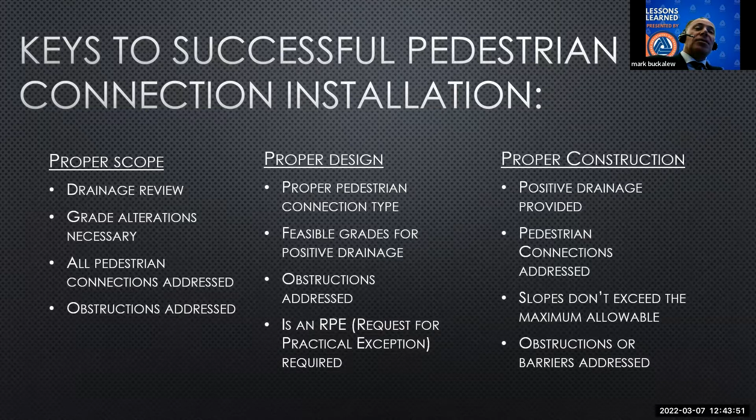And then it goes into construction. Yes, it is our responsibility to make sure we provide proper drainage, and it helps if the previous steps are done - making sure we have positive drainage and we're all on the same page. Again, in construction, we have to make sure pedestrian connections are addressed, that our slopes don't exceed the maximum allowable per the PROWAG manual, and that we address any of the obstructions or barriers along the pedestrian pathway.

Some common misconceptions about construction - I've heard these comments over the years, and I kind of want to address some of these to put those misconceptions to rest.

Construction just doesn't pay attention to the finer details of curb ramp construction. That's not quite true. There's a lot of difficulty in building some of these ramps, and I'll get into that. A lot of it has to do with the material we use and the equipment we have to use to place it. And if construction did a better job managing these projects, it would save time, effort, and money.

Again, I don't find this to be true at all. There are some really meticulous elevations we're trying to hit, and it's really difficult with some of the equipment and materials we have. The last one is construction just doesn't care about ADA. I believe that to be patently false, because I know the people I work with, and we do care about ADA facilities. It's just some of the difficulties we have constructing them that make it frustrating at times.

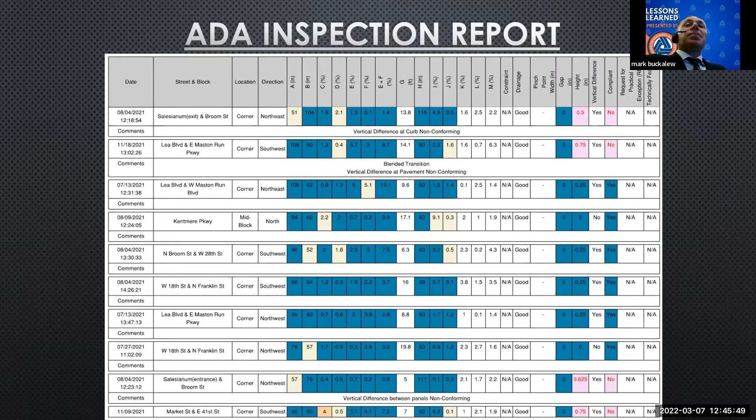Now, this was basically a pavement rehab project, so there are no grades on a pavement rehab project - it's really mill to put back to, except sometimes we'll have grades along the curb ramp themselves to help provide positive drainage across the pedestrian pathway.

When we looked back at the Google Earth history, we noticed there was already an existing ponding issue at this intersection. So when we milled to and put back to, all we did was put the problem back in the same spot. But it got flipped to construction to take care of, which we did - we had to mill and pave this again to push the water out along the curb line to get some positive drainage.

ADA acceptance issues, construction feasibility - I believe everybody watching this right now knows what this piece of equipment is. It's a roller, a hot mix roller. It's really necessary in order to compact the hot mix properly. This is a big part of our struggle to hit some of the minute grades required for ADA curb ramp construction, and I'll be referring to this piece of equipment quite often here.

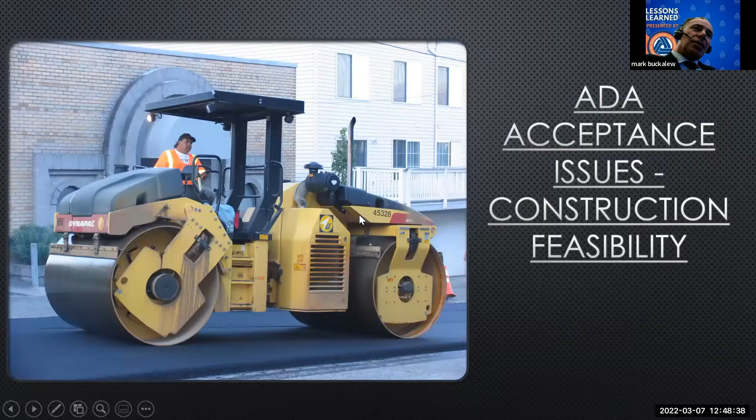Even if we placed the hot mix and hit all of these slopes - and I'll go back one - by the time this huge roller hits it, all of these grades pretty much get mashed together into some other percentage that we don't really know. We cannot hit these grades using a roller, which is a difficulty here.

When we see something like this, I've talked to some other prominent figures around, trying to get their opinion on some of our struggles. I asked Mr. Johnson, and his response was, come on man, we can't build something hitting those slopes and then hit it with a hot mix roller. So Mr. Johnson even agreed that it's not feasible.

The next piece I have here is an integral curb and gutter. The top left photo has a lot going on, so I'll break it down. It's an integral curb and gutter per the PAS standards. The back of curb, noted as K on our ADA inspection report, has a maximum slope of 8.3%. The L, or the pan part of the curb, has a maximum slope of 5%.

Now we had a situation come up. I'll protect this person's name at the time, so nobody goes back after them. But they had a curb ramp here with an integral curb and gutter, and it shows 5.6% on the back curb, and on the pan it was 7.1%.

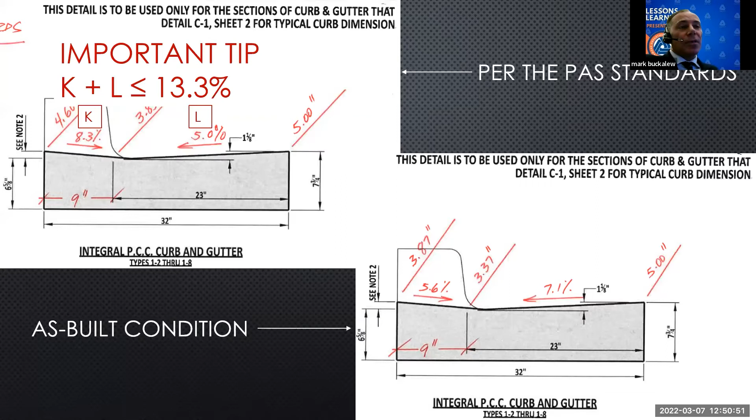Now you can say, Mr. Buckalew, 7% is pretty excessive when the maximum is 5. I agree with you, 7% seems excessive. But when you actually run the numbers, this 7.1% over 23 inches is about a half inch - actually less than a half inch. So when you're trying to finish this concrete and pave it to match your pavement, it's really hard to hit those minimal percents with the materials we're using and the field conditions we're dealing with.

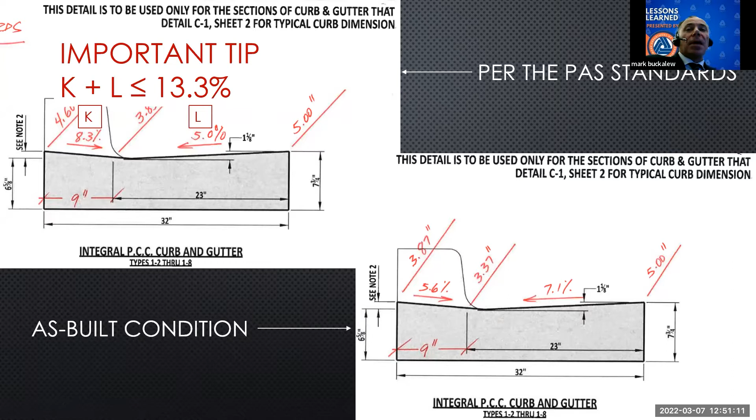So what happens is when we have a gas valve along a pedestrian pathway, we end up failing those. There's not much we can really do because we don't own the gas valve, we don't spec out that gas valve - that's the gas company. So these end up failing.

So again, going back to that quote that construction doesn't pay attention to the finer details - it's not really the case. It's hard to do with some of the materials we have and some of the equipment we have to use. That roller isn't a finite piece of equipment to hit those grades. So again, I asked some other prominent figures what they thought of these issues and what we can do.

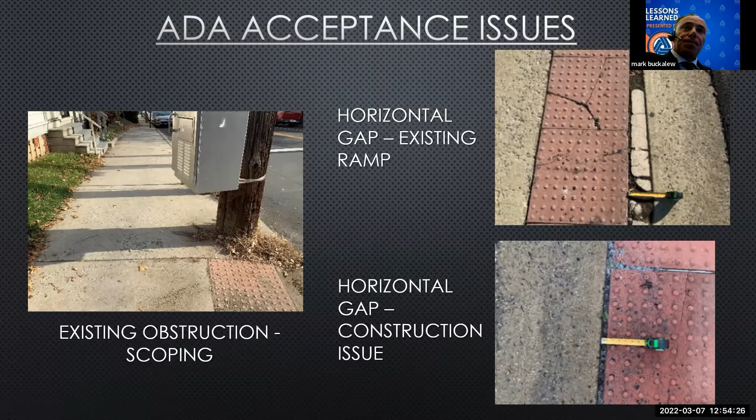But this isn't really a contract issue - the contractor didn't build it improperly, they did build it properly. It's just we're going to end up holding water because of the sediment in these flat curb ramps. But again, this is what we have to deal with here.

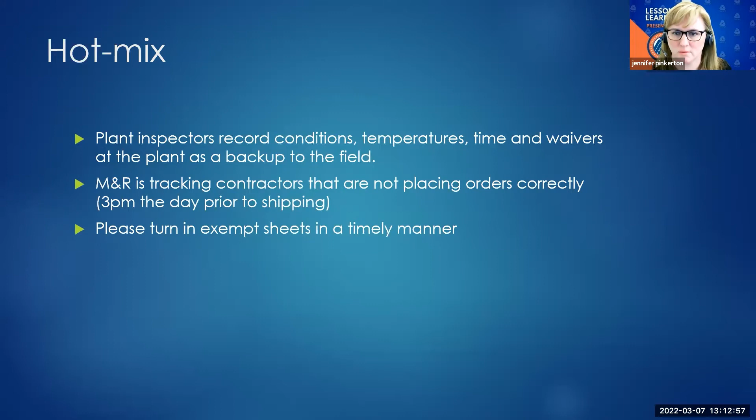Please also make sure you're turning in your exempt sheets in a timely manner. If you don't, and we send out something automatically with zero pay, only to have to redo it, it doesn't make that process very efficient, and it wastes time on our side and on the field side.

All right, moving on to concrete. Just a heads up, many of you have seen this, but it's not been on all projects at this point by any means yet. We have two companies who are now approved sources that have mobile mixers: one is GFP and the other is Curbs, etc. They're pretty much able to supply most mixes except Class D right now. If you have them showing up as a source on your project, they've been approved as sources for a good majority of the mixes. If you have any specialized mixes that are not made at the plant, I have a couple examples there.

Like the ultra high performance concrete, grouts, et cetera. For any maintenance or construction staff, please make sure your inspector is reaching out to the lab directly to get inspection set up. We otherwise will not know when that's getting ready to be placed. Our folks call the lab or the plants daily, but if these mixes, which are not being made at the plants, are not part of those orders that come in, we really need field staff to make sure they're giving us a heads up and a call when these kind of projects are happening. Typically they're picked up at a pre-pour or similar meetings, but every once in a while there's a mix like this that might not be on our radar. So please make sure you're reaching out.

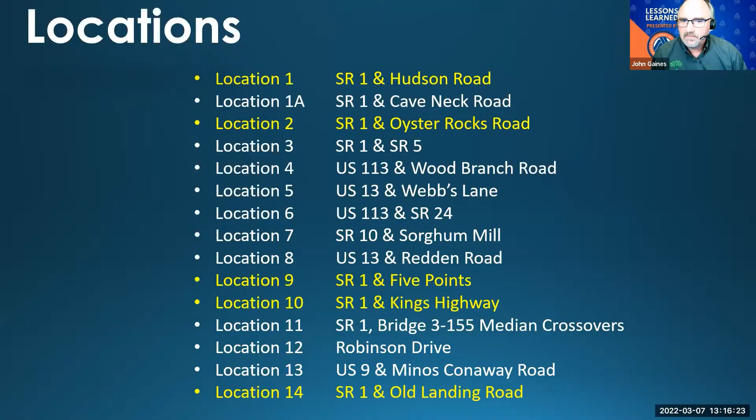I can't get the screen to advance, John. Yeah, all right, just a delay. Okay, well, I'm glad it didn't jump forward like 3 since I hit it several times.

So we started out with this initial 6 locations. This grew to 14 locations throughout the life of the contract. The ones in yellow here are still in the design process, and due to issues that we'll discuss later, they are being advertised — location 1 and 2 as a standalone contract, and 9, 10, and 14 as well.

Guess there's still a delay.

Do you have control of it, Brian? No, I don't. Oh, here we go.

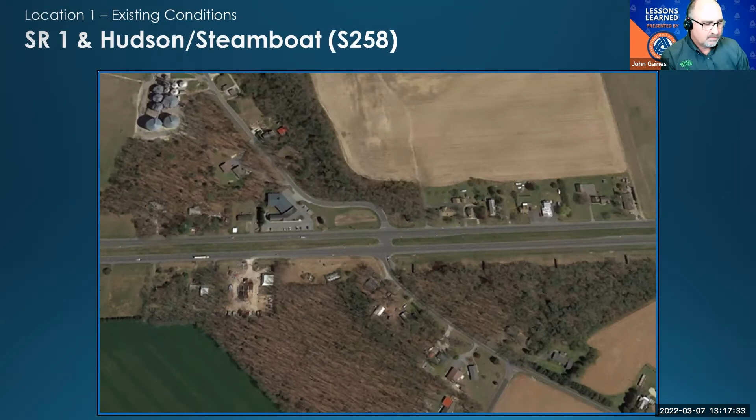The first location is on Route 1 where Hudson Steamboat intersects Route 1. Currently all movements are available from SR1 and the side streets, causing bad accidents. Our proposal is to channelize the median, providing left turns from SR1, with side roads becoming left in, right out. This one's still in design, and we're going to bundle it with location 2, hopefully delivering those once we see how things go at Route 1 and 16.

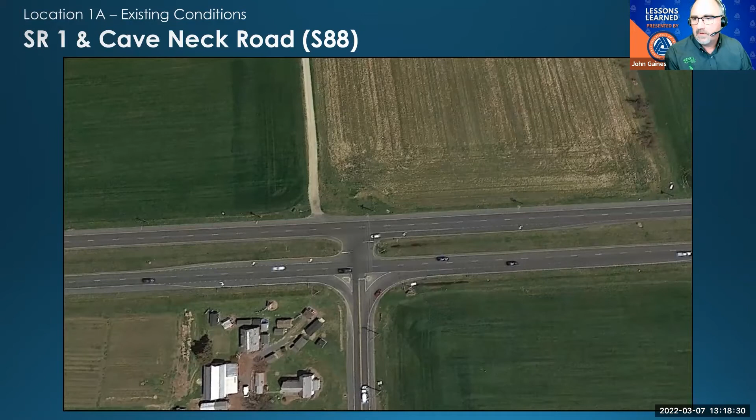This we're calling location 1A, at Route 1 and Cave Neck Road. As you can see, all movements are there as well. Maintenance had blocked off the southbound left turn lane with flexible delineators, but we know how those work, so the goal was to get that removed and extend the northbound left turn lane. I'd like to thank Josh McCloskey and his drone crew for these as-built pictures. The median's been channelized, the southbound left was removed, the side road was channelized, and the left turn lane is now about 600 feet longer than it was.

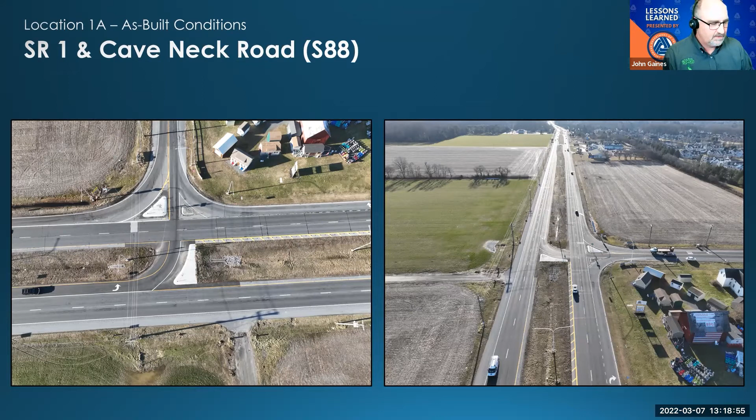Location 2 is at Route 1 and Eagle Crest/Oyster Rocks, again an intersection with full access. The proposal here is to remove the Route 1 left turn access and provide left turn acceleration lanes for the side roads. Between these locations we're also removing quite a few median crossovers and expanding one for U-turns.

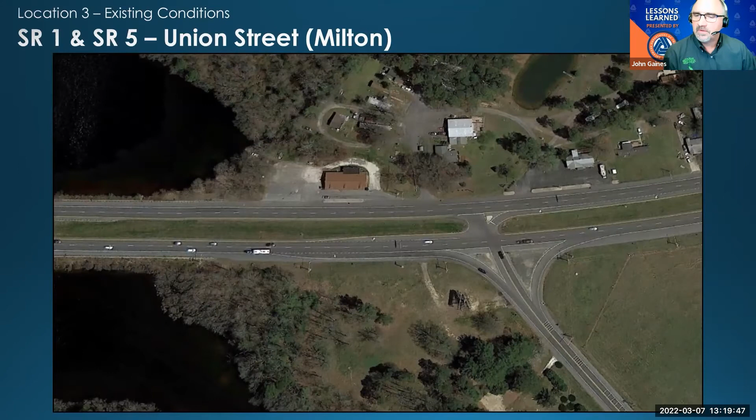Location 3 is at SR1 and SR5 coming out of Milton. Again, all movements are available, causing confusion and accidents. This one is built. We took out the access from SR1 to the side road, channelized Route 5, channelized the median, and provided an acceleration lane.

The next location is at US 113 and Wood Branch Road. This one has a bit of history - it was a former capital project location, US 113 and Almshouse Kruger, and had quite a bit of public opposition, mainly from local farmers worried they couldn't get from one side of 113 to the other. It went through several changes over the years.

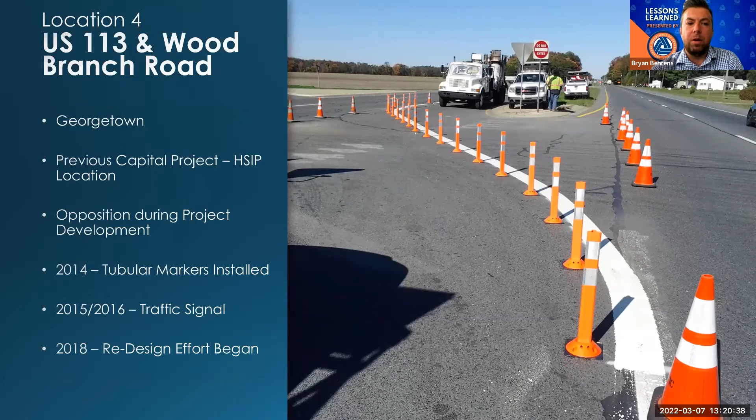This was the original existing condition back when we had the capital project - two intersections very close together with full access. We saw a lot of bad accidents from people basically trying to get from one side of 113 to the other.

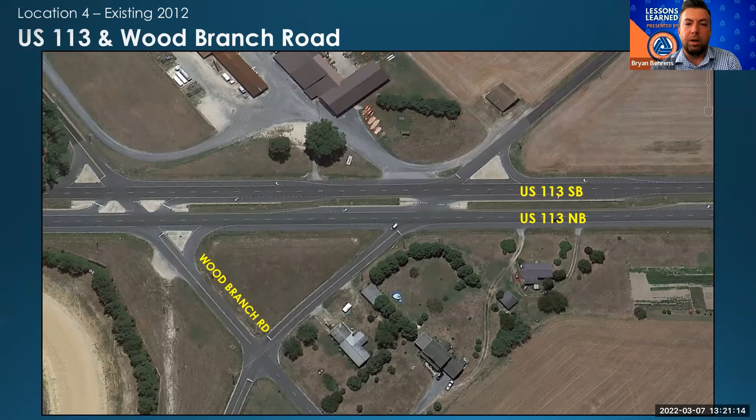From the time that started up to about 2014, a lot of that public opposition occurred. We had some bad accidents, some fatals in 2014, that necessitated the department moving forward with shutting down the median. We put in flexible delineators, really restricting that movement from one side of 113 to the other as a result of those accidents.

Part of that negotiation or compromise was to install a signal, which we ended up doing between 2016 and 2017. This shows the existing condition we were left to work with - a signal was built at the Wood Branch Road intersection, and the other intersection was basically closed off with those flexi posts.

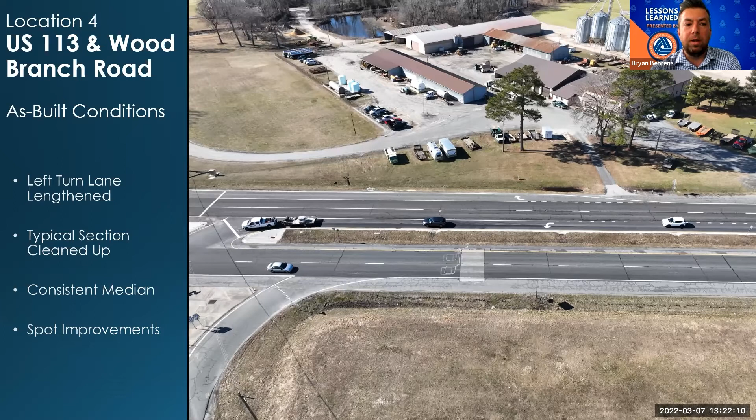What this project aimed to do was formalize that. The intersection at Wood Branch still remains with the signal, and we extended the left turn lane - it more than doubled the size of that turn pocket, and cleaned up the median between those two intersections. The length of that turn lane extended past Speedway Road too.

Good project - this was one of the first ones that went out and got constructed under the original open-end contract that we'll talk about later.

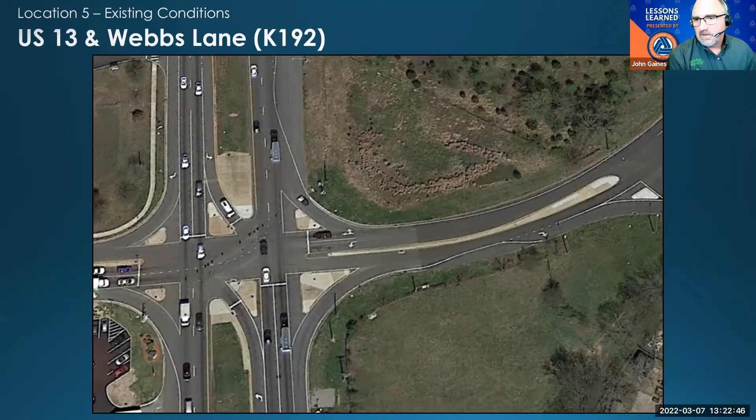Location 5 was here in Dover, on Route 13 where Webb's Lane comes out. There was no right turn lane to go from Webb's Lane heading north, which used to back up the through lane constantly. We came in and added an actual right turn lane, which came out very nice. Locations 3, 4, and 5 were the ones actually advertised with the contract - we'll talk more about that later.

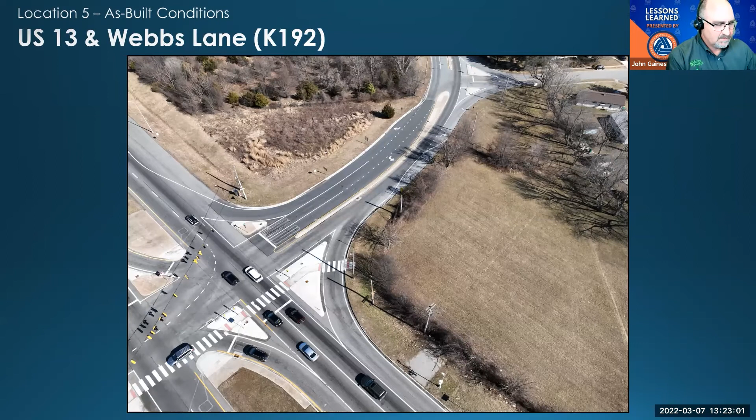Location 6 is at the intersection of US 113 and SR 24 in Millsboro, right by the Wawa. We affectionately called it the SR 24 Wawa project. This came out of the US 113 North-South study as an interim or spot improvement to install a right turn lane, but the actual project was to provide enough width for 2 trucks to get by each other.

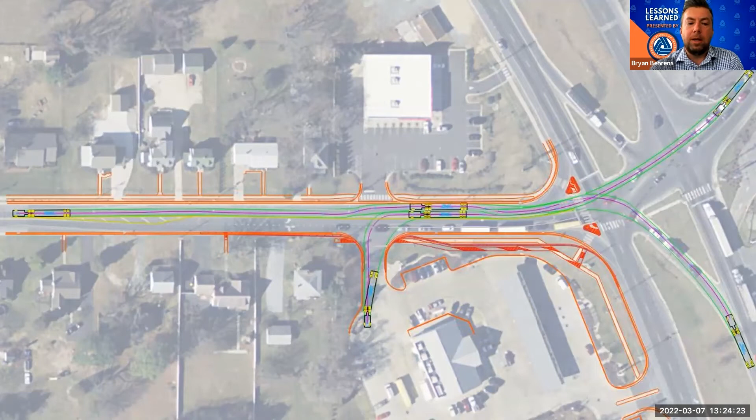Another interesting part of this project was that it included a right-of-way acquisition phase, which is really different from most of these other open-end locations. Most don't involve significant utility relocations or right-of-way acquisition, but this one did, and we had to get right-of-way, which ended up being donated from the Wawa. So, good project all around.

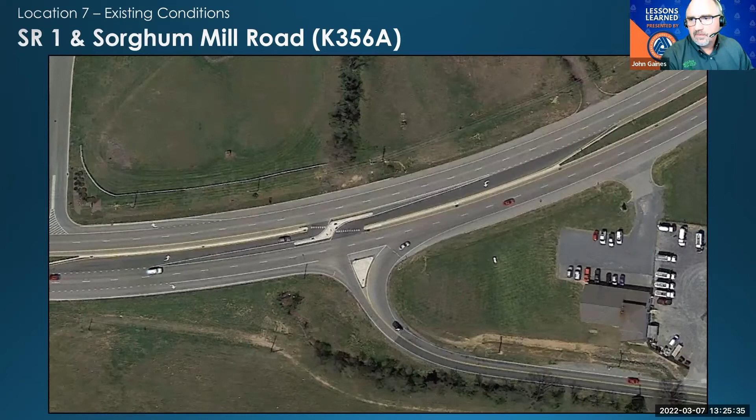Location 7 is here in Dover as well, on Route 1 where Sorghum Mill ties in. This was the existing condition: it was already channelized, but the left turn lane would back up into the left through lane at peak hours. So we came in and extended the left turn lane as far as we could, probably another 300 or 400 feet of storage.

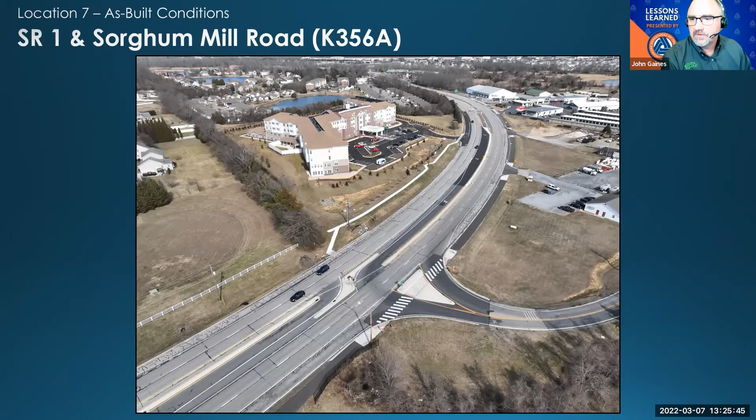The next project is at US 113 and Redden Road, location 8. Redden Road really isn't the secret cut-through anymore - it's a very busy road, especially in the summertime, as an alternative to Route 404 for traffic coming from the Bay Bridge to the beaches. On the other side of Redden Road, we built a left turn lane extension and acceleration lanes from Redden Road onto 113 in the Georgetown area back in 2018.

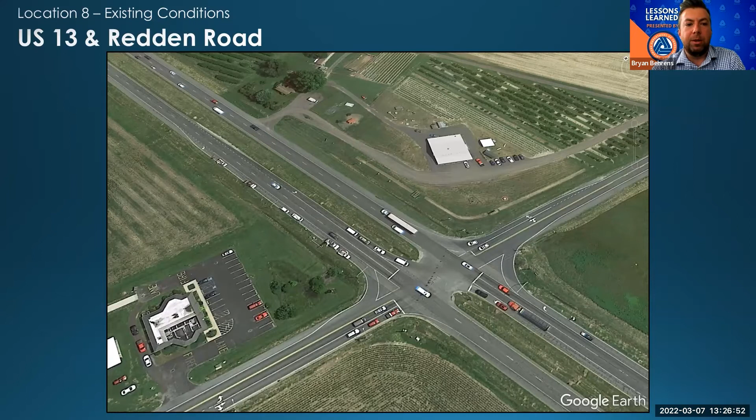The next one I'm going to show you is a bundle - this is the one John referred to. We have a coastal highway intersection improvements project. This is 3 locations that will get advertised together, and the reason is they're a little bit different in nature, though all pretty close to one another. This picture is of 5 Points about 75 years ago, from 1950, just to show how far things have come. But we tracked these originally under the open-end program.

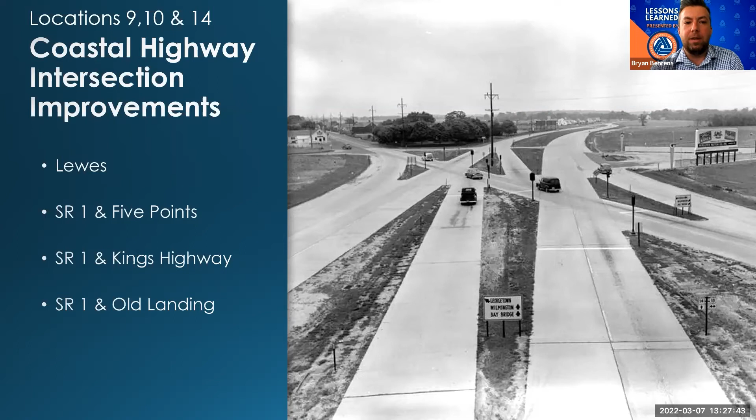So this project really is a breakout of the overall SR1 and Minos Conaway grade separation project that is in the right-of-way acquisition phase, close to moving towards construction. That project's scope is really to remove all of the crossovers on SR1, which are a contributing factor to the safety and crash pattern out there, and that project hopes to fix. So this is an early action part of that.

This will allow U-turns at 5 Points for the left turn southbound onto northbound movement. Today, anyone wanting to make that movement actually has to go through 5 Points, make a left onto Savannah Road, and use the at-grade loop to come back around and access northbound SR1. So we're going to allow that U-turn movement.

In order to do that, we have to rebuild some of the pork chop island on Savannah Road. And while we're there, we're going to build the auxiliary/merge lane that will be part of the decel lane for the off ramps associated with the grade separation project. So this one does have a bit of a time factor to it. We want this done before we start construction on the overall Minos Conaway project.

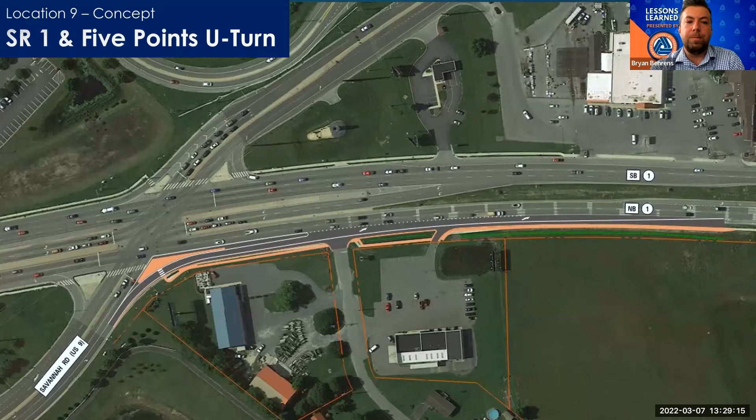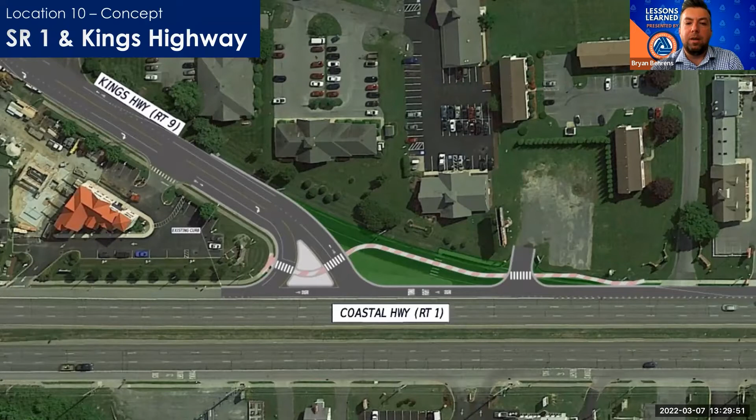The next location is further down Coastal Highway, at SR1 and Kings. This is born out of some bad fatal bicycle accidents at this location, and we're looking to tighten up the radii for the right turn onto Kings Highway - that's traffic moving northbound on SR1 entering onto Kings Highway, which is the movement we're trying to slow down. We'll also clean up some of the pedestrian and bicycle connections in this area.

This next one is a bit of a new one - the previous two have already been through a design effort with our support sections, but this one is just in that phase right now. A little further south from Kings, this is where the Walmart shopping center is on Coastal Highway in Lewes. There's a double left turn lane on the northbound SR1 side turning into Rehoboth Mall Boulevard, and those don't get used nearly enough - there isn't demand for a double left turn lane there.

So we're going to try to repurpose the median and extend the left turn U-turn movement for southbound SR1, because there is demand there. That's what this project will hope to achieve - it'll more than double the length of that U-turn movement, which can see significant stacking at peak hours. That project will all be bundled together and advertised, and they're working through that process right now.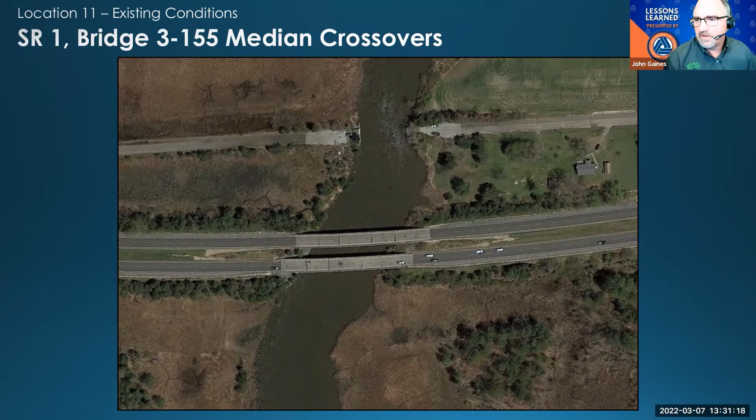The next location was actually a bridge project - bridge 3-155 over the Broadkill, which is currently under construction. They asked that we facilitate the median crossovers for the contraflow for these bridge closures. This one went out pretty early. The picture doesn't really show the median crossovers well, but it just showed that we were helping our friends over in Bridge.

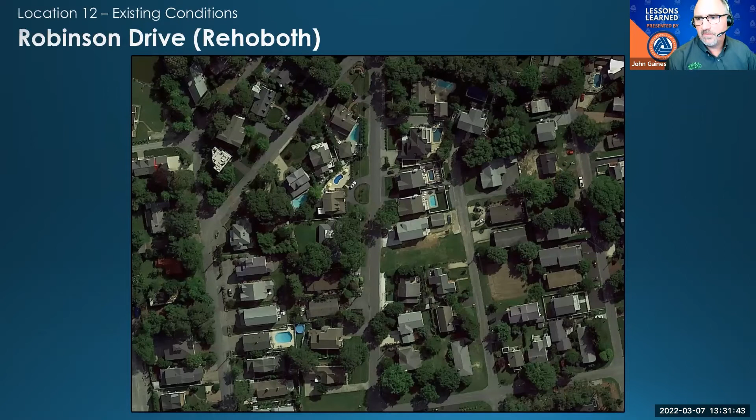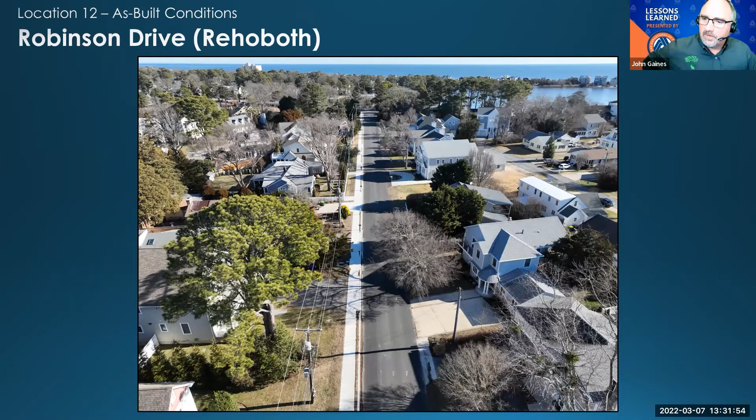Location 12 was actually a CTF project for a legislator. It's on Robinson Drive down in Rehoboth - it was a resurfacing and sidewalk installation. That one was completely out of our wheelhouse, but it was run through this contract.

Location 13 was at US 9 and Minos Conaway Road. This is a CTP project, I think beginning PE funding either next year or the year after. Where this one got started was, again, with the SR1 and Minos Conaway grade separation project - this Minos Conaway Road will be a detour route, and we know there may be significant demand on the right turn movement there to get onto 9. There was also a pavement rehab going to resurface Minos Conaway Road, so we looked at opportunities to install a right turn lane, hoping we can knock out the future capital project with this one.

The next slide shows the existing condition there - the screen's kind of flipped. What we did here was really just use the right-of-way that already existed, dedicated from the subdivision. You can see the hammerhead entrance there and the sidewalk, and we used that space to put in the right turn lane. So we did not need to acquire right-of-way for this project.

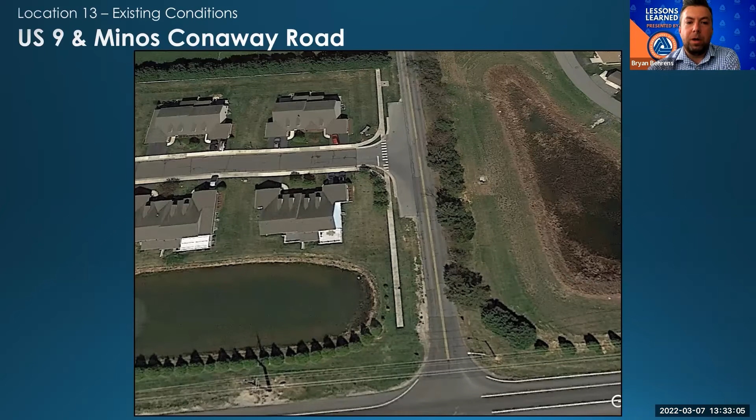I think I touched on most of the finance bits, but as the financing kept changing, not only from federal to state only, but there's different funding for NHS versus local roadways. As we worked through that with Federal Highways, they eventually shut down and were not going to participate any longer due to the mixing of so many different funding sources, which was the first step of the demise on this contract.

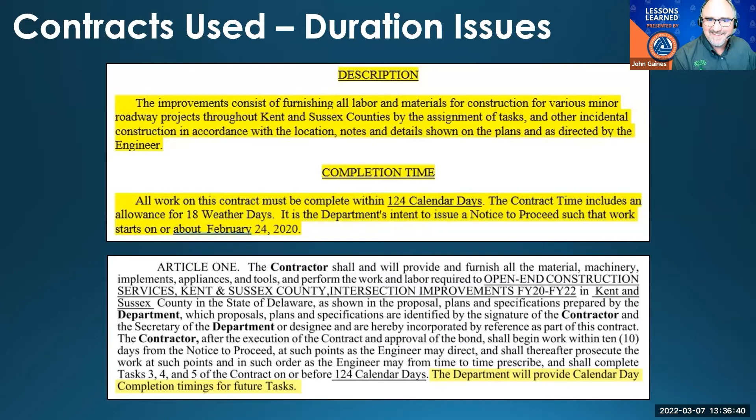No, that was good. I just want to say thank you, really, because all these sections had to come together to get these built, and most of these are built and done pretty quickly. When you think about our overall program, projects can take years - they do take years - and our projects lately seem so big, large and complex that it was kind of refreshing for our group to work on some of these that had an immediate impact and we could build and get out there quickly.

All the support sections that helped - we still had to go through all of our reviews and get statements for some of these. Then on the back end, pavement rehab, and the construction staff that was inspecting it and managing it from that end - just to say thank you, because it can be viewed as extra, but we're still delivering projects that have an immediate impact to the traveling public.

So I think it's overall a success, but definitely some growing pains and lessons learned, like John said. Yeah, one other lesson to add was all of the original locations on SR1 were supposed to be night work, but then when the world got shut down by COVID, we were able to do all of those locations during the day, which made it much easier on the contractor and the construction folks. So there's a silver lining in every situation, I guess.

And thanks again to Josh and his crews for the photos. There's also videos for each one of these locations, but that would have taken way too long for this presentation. So I think that's it from us, John.

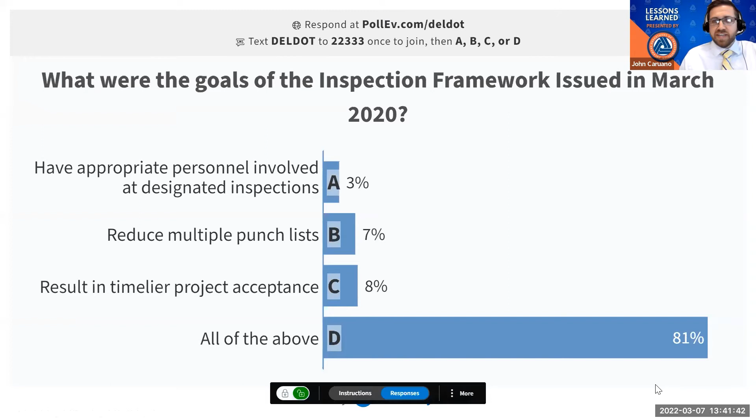All right, it seems like a majority of you answered D, all the above. I think with most multiple choice tests, having that option piques your curiosity and you think that might be the answer - and it is, all the above. Let's see if I can go forward. So that was all the above - all those had the same goals, or we had those goals.

One of the highlighted priorities was project acceptance, though. That's what we wanted to try to focus on improving.

So at last year's lessons learned workshop, I presented an overview of our progress to date, some examples of punch lists, some good annotation on the initial punch list, and some items we saw in primary inspections - some repeat items that keep showing up. Then I discussed the next steps we would take as a department to look at the framework going forward.

Since then, we looked at the data from March 2020 to February 2021. We did 123 ADA inspections. 85 of those needed corrections of some sort - they had ADA compliance issues like Mark Buckaloo was talking about earlier. And 38 of those reports were actually compliant, so we didn't have to take any other steps.

The average time it took us to have the inspection from the request was 23.5 days, and we're always trying to work on improving those numbers as well.

Looking at primary inspections from the same time frame, we had 122. Of those, 53 initial punch lists were submitted with the request, which the framework requires. Only 7 of those 53 had an annotated initial punch list - this indicates the item was resolved and usually shows documentation as to how it was resolved.

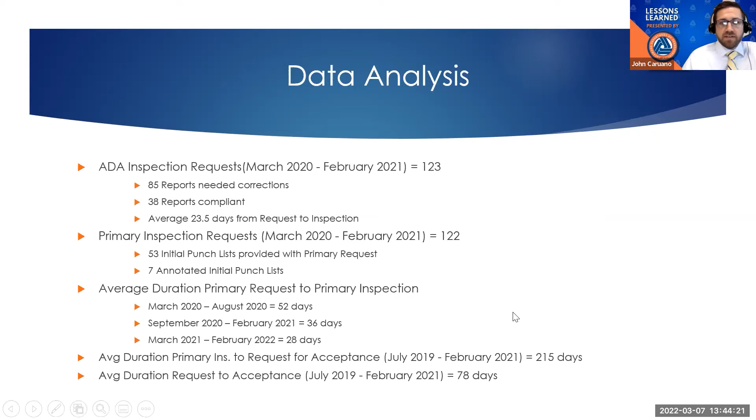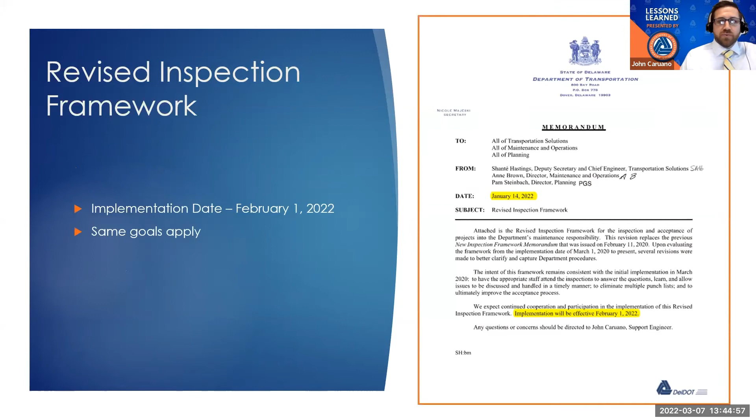So some data that we looked at, along with observational feedback from various groups we polled last year. We surveyed the administering construction groups, engineering support, DCA, and maintenance and operation, and asked how we could improve this process and what they'd like to see going forward. We took that data and revised the framework, changing the verbiage with a lot of the same players involved. The revised inspection framework was issued in January with an implementation date of February 1st, 2022, and the same goals still apply.

So next, we're going to have a riveting good time and look at the text changes. Brace yourselves, this is going to be a great exploration in wording.

So in the first section there, we talk about the ADA inspection, that it should be held approximately 30 days prior to the initial inspection and identify any deficient items. We also discussed the use of ACIA, the ADA Compliance Inspection Application, to document feasibility or accessibility measurements for reporting purposes.

So we'll use ACIA to report out to construction the items that are deficient. We also added a section talking about the initial punch list to include these ADA items, and that the administering section will utilize ACIA to make any updates to the items listed. So as we correct those deficiencies, we should be using ACIA to document changes, like if it's a percentage change, or take photos or provide other documentation as to why something wasn't addressed.

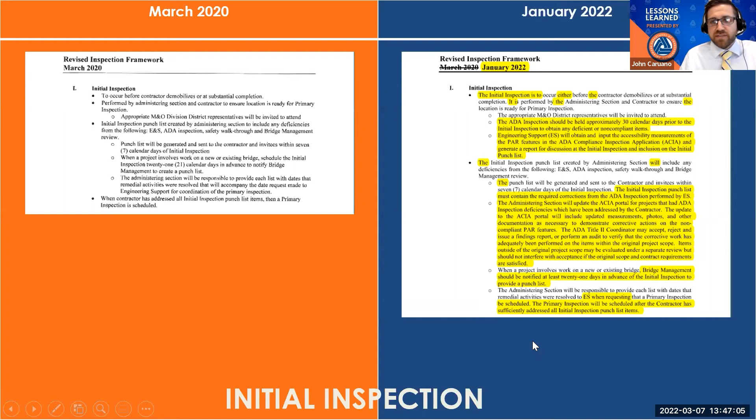So really the takeaways here: the ADA inspection should be held 30 days prior to the initial. We know that's not always practical. As an administering section, you don't want to schedule it too early, otherwise you're going to have a lot of non-compliances. For instance, if we request the ADA inspection before the top surface is provided at a pedestrian connection, you're going to have a vertical surface identified as exceeding that quarter inch. So you should try to have all the features up to a level that we can actually perform an adequate ADA inspection. We don't want to waste too many people's time with unnecessary non-compliance if we're not ready for it.

Also, the ADA inspection is going to be documented in ACIA, which I talked about. The punch list should contain these ADA items, and the administering section will now be using ACIA as part of the punch list annotation.

So moving on to the primary inspection. Really here, the scheduling was revised. As I talked about earlier, the transition time when we rolled this out in March of 2020, we had 45 days as we were changing our processes, and then we changed to 30 days after 6 months. So we're going to leave that at 30 days, but we also included the request for the primary inspection to include an annotated initial inspection punch list.

So this is the list that has the items rectified, as well as how it was resolved and the initials of an administering section representative. That's also in the middle of your screen there, where it talks about the annotated initial inspection punch list including the dates of when an item was remedied and resolved, as well as the initials of the administering section's representative responsible for oversight of the corrective actions.

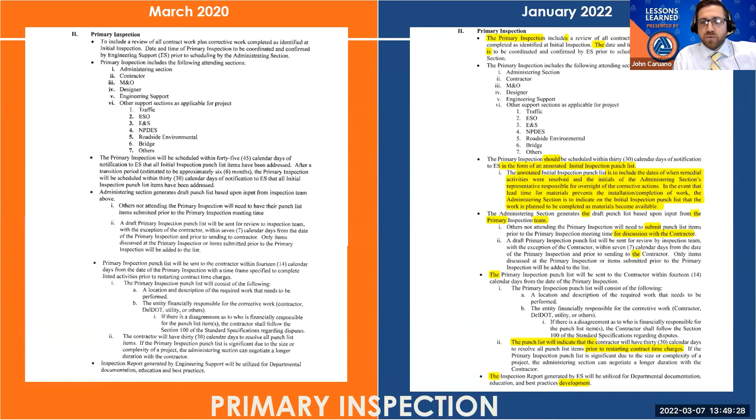So the takeaways again: we're going to schedule the primary inspection 30 days within receipt of that annotated initial inspection punch list. The annotated initial punch list includes the dates of resolution and the initials of that administering section representative, and also indicates items that may have long lead times. So if you can't get a material to complete the work, please let us know on that annotated initial inspection punch list.

Moving on to the acceptance, we removed the word inspection at the top of the screen and added some information regarding the ADA side of this. We included the language about the ADA Title II coordinator reviewing the primary inspection report, as well as the ACIA data updated by the administering section, and then issuing a recommendation for acceptance to maintenance and operation, as well as engineering support. That recommendation for acceptance should happen within 15 days of receiving the annotated primary inspection punch list.

And at the very end, we just added a line about project closeout and beginning the project acceptance process.

So again, I kind of just reiterated those same facts, and I know this is a very dry topic to talk about, but I encourage you to read the framework and get familiar with it. If you have any questions, please reach out to myself and we can try to work through it.

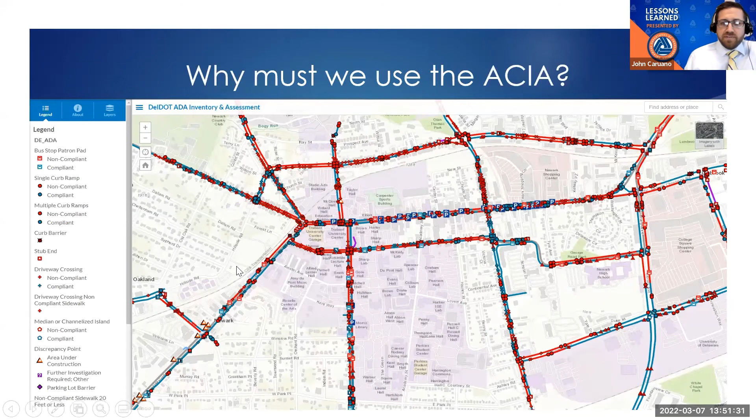So why should we use ACIA? Well, we're capturing a lot of information when we do our inspections. This is actually a screenshot of the DelDOT ADA inventory and assessment, used for updating the transition plan. So we're capturing this information to report on our compliance and accessibility of our pedestrian network. So you all, as administering sections, are critical in that role of turning these facilities to a compliance state.

So we only had the paper forms previously, and it was very cumbersome to take all the paper into consideration and evaluate our network as a whole. So having this ADA inventory like this makes it a lot easier to manage and understand where our weak links are, where our disconnections are, and so forth.

And just a note there, in 2021 we actually changed the compliance status, or set the compliance status, for 3,188 curb ramps. So those are both new curb ramps and ones that were affected by our projects that were inspected. That's a lot of curb ramps that were brought online as part of our efforts over the past year.

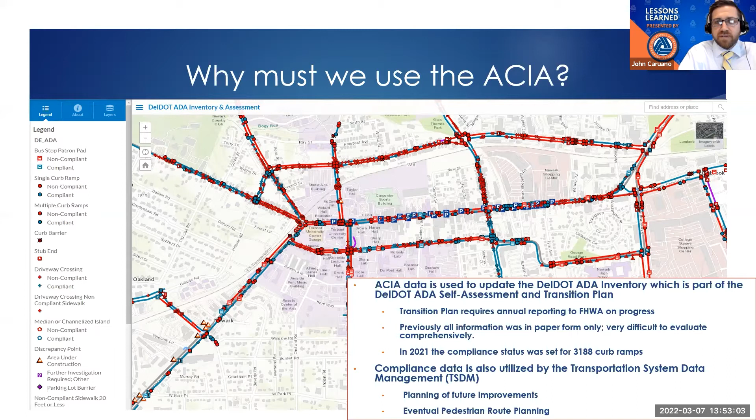And we can use this data through the TSDM. This allows for better planning of projects and scoping of our future improvements. It also allows for the eventual pedestrian route planning and investigation of compliance inquiries. If the public would inquire about the status of a certain facility, we could utilize this desktop tool and visualize the location and see if there's compliance issues with that location in question.

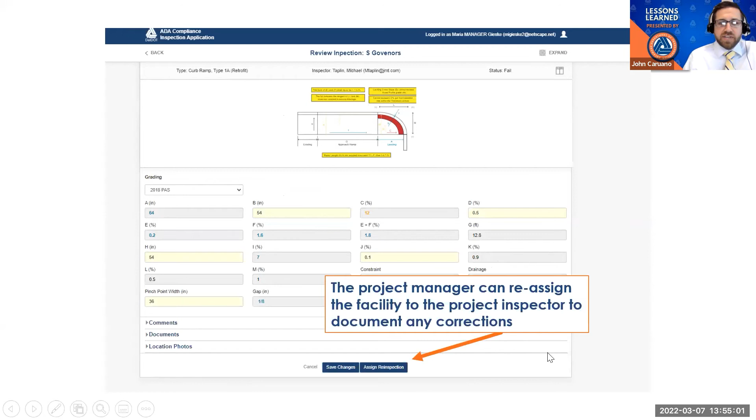So you select Review Complete to access the data. Again, this is the project manager's view. They open this up and it shows the type of facility that was inspected. There are a few fields that are in red text, and those show you the features that are not compliant and need further remedy. So the project manager can then reassign the facility to the project inspector to document any corrective actions.

You'll have the same screen that the manager had. Again, it's in red. Make the corrections to those values. If they're the correct values, they'll change back to a blue color. Then you can use these fields on the right-hand side to add a comment, upload a document or correspondence.

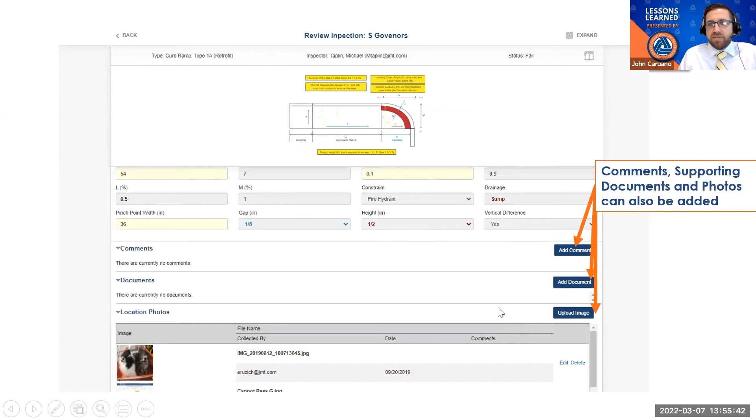Or even include a photo regarding the reinspection. Then you would save the features, and the workflow goes back to the manager.

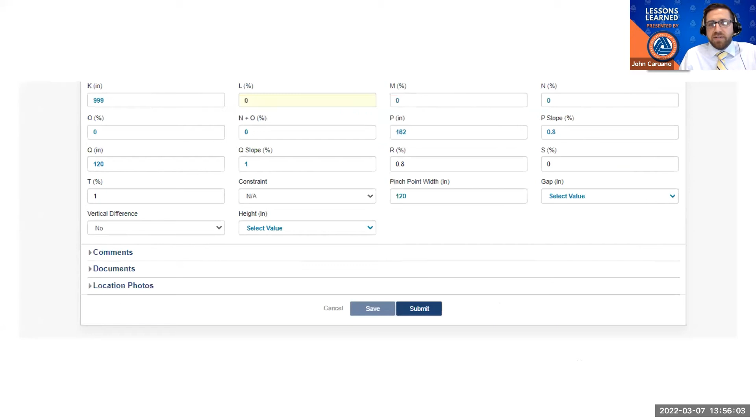If you would like any training on ACIA or access, please contact Maria and she can get you set up. We also recently included some directions on the DelDOT construction manual wiki page under Part F, e-construction, I believe at the very bottom, Part 4, which has step-by-step directions on how to enter the data from a project manager or inspector standpoint.

So just to recap the recommendation for acceptance process I talked about earlier: once all those facilities are re-inspected and submitted, you will request the ADA inspection by emailing dot.adasupport@delaware.gov.

Include the original ADA report that was issued by engineering support. It makes it a lot more helpful for the review. The ADA section may review, request re-inspection, or request any additional information if necessary to verify that things have been resolved.

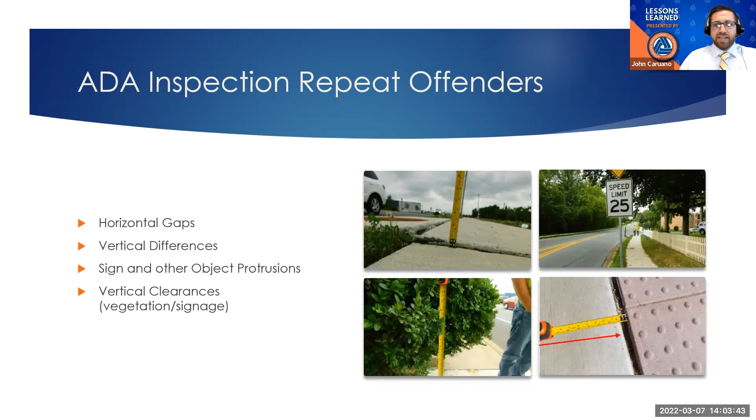There's a few items on the primary inspection that keep coming up too. I know Brad specifically is going to talk about some of these tomorrow on his pre-initial inspection checklist efforts, so I won't go into too much detail, but things like the sign sleeves, we see exceeding the 4-inch maximum on a routine basis. Also pin assembly not installed properly for double street blades, and concrete joint spacing - sometimes there's no joints in the concrete.

Inlets need to have steps when they're over 4 feet. Also flow channels and the grade orientation sometimes is not correct. Things like vegetative stabilization, guardrail hardware might be missing or loose, and bituminous joint sealing - when we have that butt joint up against the new pavement, we should have a joint seal along there.

Also the sidewalks and shared use path adjacent grading, we should be at 6:1 for 2 feet. I know it's not always practical, but that's what the detail has, and that's typically what's in the typical sections on the plans. And then utility cover access - it might not just be for the utility companies, but even the DelDOT maintenance access for manholes.

So again, like I said earlier, we're trying to get to a timelier project acceptance. How can we achieve this? How can we move the scales down a little bit? I think we saw earlier it was like 200 and some days, and 70 some days - that was back in 2019 to 2021. But we want to really reduce that time frame here. So if we catch more items on initial inspection, it'll help head off some of these long punch lists, so we can eliminate those repeat offenders we keep seeing.

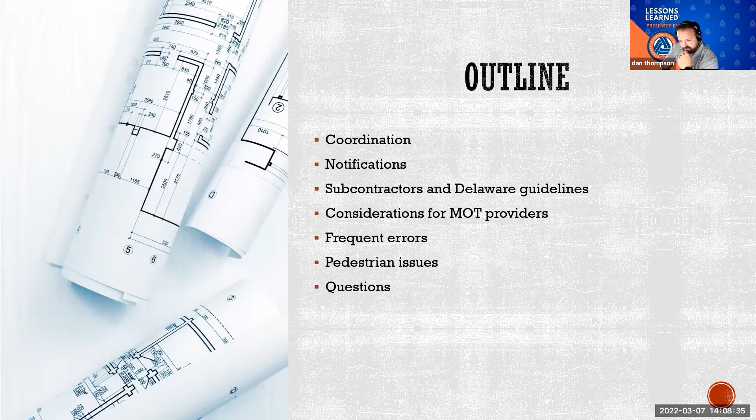All right, so coordination - what needs to happen with coordination? Prior to the utility permit submission, so if there's any questions about MOT, it doesn't have to be a utility permit, any kind of MOT coordination, please reach out to us, Traffic Safety. We're not trying to hold things up. I know it might seem like that, but we're here to work with you, work through it.

We'd rather hit it right off the bat and get everything done so there's no hiccups in the plan approval or utility approval process. So prior to capital or advanced relocations, these will have a set of approved plans, so any changes or modifications need to be coordinated with traffic safety and the construction staff. These projects will be subject to pretty much the same time restrictions as the main project, so anything that goes out for advanced utilities has to follow those same guidelines or that matrix that's in those plans.

So the utility contractor needs to make sure that they get out and that those are referenced to them before the work begins. And then everybody needs to coordinate with adjacent projects, any road work, construction, or MOT working in the same area. They all need to coordinate and make sure that things aren't overlapped or in conflict with the Delaware MUTCD. Again, we can come out and help you guys out with that too.

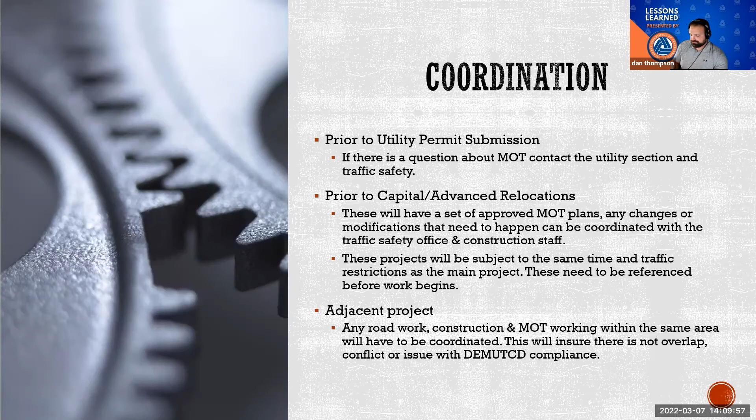All right, so subcontractor issues. Some of the issues we've seen are there's subcontractors that come from out of state that aren't familiar with Delaware standards. We need to make sure they're familiar with the Delaware MUTCD, our contract guidelines, and the time restrictions. They'll come out and say, hey, this is what we do in Maryland, this is what we do in Pennsylvania. We need to make sure they're educated on what they need to be doing in Delaware.

Field issue resolution. So when we go out in the field, we need to know who the point of contact is. They like to play the blame game a lot. If they're a subcontractor for the GC and they're from out of state, it's 'they didn't tell me' or 'I didn't get that information.' So make sure everybody in the field is coordinated, and that person is the one who can actually make the change. We run into that quite often.

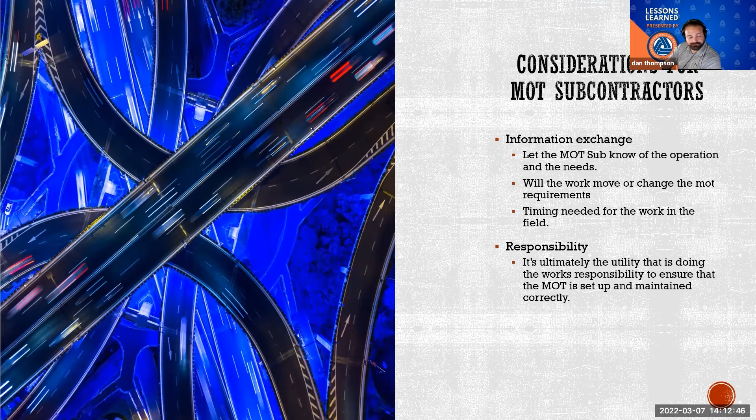Some errors that we see with flaggers. A lot of times we'll go out there and there's flaggers that aren't certified in Delaware. They may have the ATSSA certification, but they need to make sure they have the Delaware certification on their card. Some states allow just the federal standard, whereas we don't. We have some state-specific guidelines when it comes to flagging, and they need to be certified through a program such as ATSSA, but also certified in Delaware.

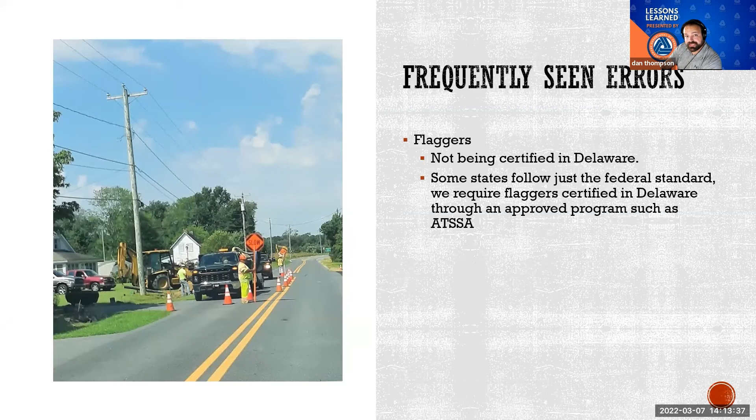So frequently seen errors that we see on signage: incorrect sign heights on temporary signs. There's a picture there of a sign that's a little too short. The standard for a temporary sign is 5 foot from the bottom of the sign to the top of the road surface, and for a permanent sign, it's 7 foot.

Some of the other issues we see is incorrect sign spacing on the roadway for the typical application. I'll have another slide that has a chart showing how far signs are supposed to be spaced apart based on the type of roadway. Another big one is we see signs being stored in the right of way all over the place when they're not in use. They need to be either removed or placed behind positive protection, because that can become a hazard to an errant vehicle running off the road.

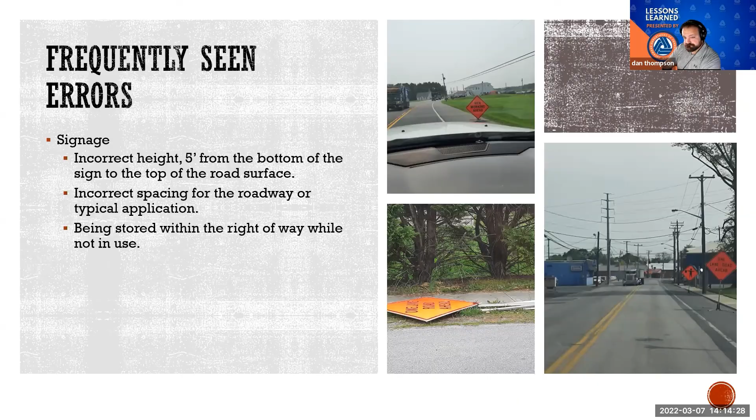Some more frequently seen errors. For devices, a lot of times they'll be damaged or dirty, and that'll make them non-compliant. If they're not reflective, if they're not bright, we're going to ask that they be replaced. We follow the ATSSA quality guidelines - they put out a pamphlet and a brochure that gives examples of what's good, what's bad, and what's marginal. That's what we use to go off of for this.

And that's also the incorrect length for the tapers, and that's what we see a lot of too. So incorrect taper length and spacing, based on the setup, the shift, the closure, the roadway, and the width of the shifted area. It might sound complicated, but the Delaware MUTCD has all the charts and breakdowns in it.

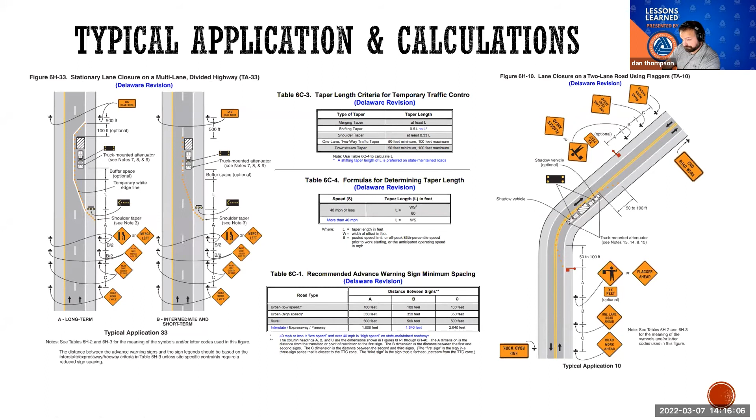Some specific MOT we see a lot of would be like a rolling roadblock. There are only special cases where we would use this, mostly for aerial crossings on major roadways, since we don't allow lines to be moved over live traffic. So that's mostly where we'll see this. Prior to an event like this, it needs to be coordinated with traffic safety and construction so we can figure out timing and make sure everything needed is going to be out there on site.

To hit on pedestrian issues, we treat pedestrians the same way as we do a vehicle. If there are facilities on site, they need to be maintained if they're going to be blocked. It's important to know the area you're working in, because it can be a little tricky if you're working down in the beach area where there are pedestrian facilities on one side, not on the other. There are different ways we can come up with working around that.

We can use a pedestrian detour. If they're taken away from the sidewalk, you have to use approved material and special devices to delineate them. You can build a path around your work zone, but you just have to make sure it's material approved for that use. And in some cases, we can use pedestrian flagging. If you're only going to be working for the day and everything's going to be closed back up at night, pedestrian flagging is a much better and easier option to use.

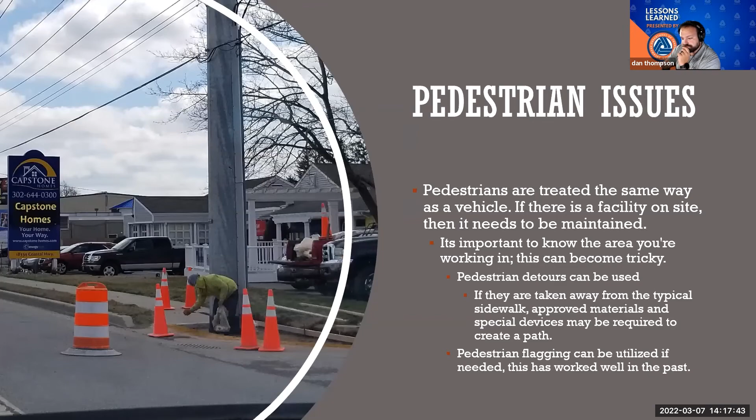We do have specific MOT for pedestrians and bikes. Down in the Dewey area, we have a shoulder that's actually a bike lane and a pedestrian lane. In those situations, we had to come up with some creative MOT. This involves closing a lane of traffic and placing the bikes and peds into that closed lane, channelizing them with specialty signage.

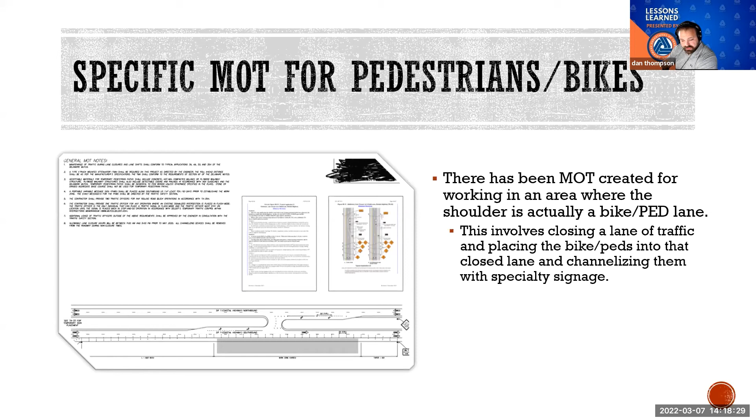This way, even if they're only working in a shoulder, those peds and bikes still have to be accommodated for, so we're going to have to close the lane. That needs to come into consideration when you're thinking about lane closure hours or things of that nature, because of the type of lane that it is - it's not just a shoulder. Pedestrians and bikes must be maintained, so once the MOT is in place, it must remain unobstructed and open to traffic, just like a normal lane would be. If you're parking a TMA, or you have a bucket truck or a piece of equipment parked in that lane, that's not what it's for. It's there to accommodate the lane that you're already closing.

To briefly hit on detour and design approval: detours must be submitted to traffic safety for review and approval. They have to be on our border with our legend, and they must be signed and sealed by an engineer. They need to be added to the UPA, or added into the plan set. The project manager will need to submit a road closure form along with the signed detour to the TMC for notification. Once all of that has been done and everything submitted, we can go to traffic safety and approve that road closure, and all that information is blasted out.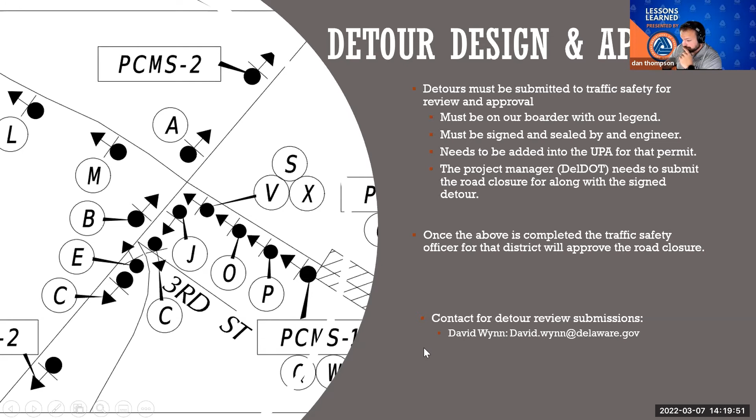And with that, I don't know if there's any questions, but that would be my portion of the MOT here. Kerry Yost is going to take over and handle the next section.

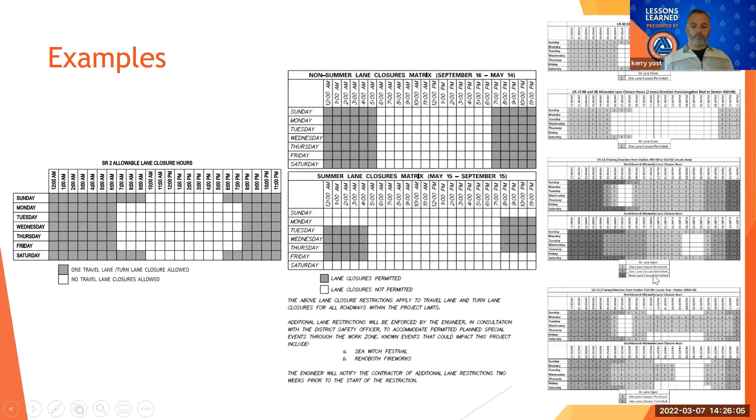Why do we use allowable lane closure or allowable work hours? We need to reduce the roadway capacity so we can facilitate doing work within the travel lanes or immediately adjacent to them. Anytime our traffic volume is going to exceed the capacity, we're going to have congestion, backups, and delays. People are going to notice their commute is delayed versus their normal travel time.

So when we close lanes, it also tends to push some traffic to the surrounding roadways. Drivers are going to seek alternate routes, and this may result in complaints and disturbances. People are going to seek cut-through routes, potentially through neighborhoods or other low classification roadways.

We also note that when we close lanes, traffic typically backs up and gets congested, and certain types of crash frequency will tend to increase, specifically rear-end type crashes.

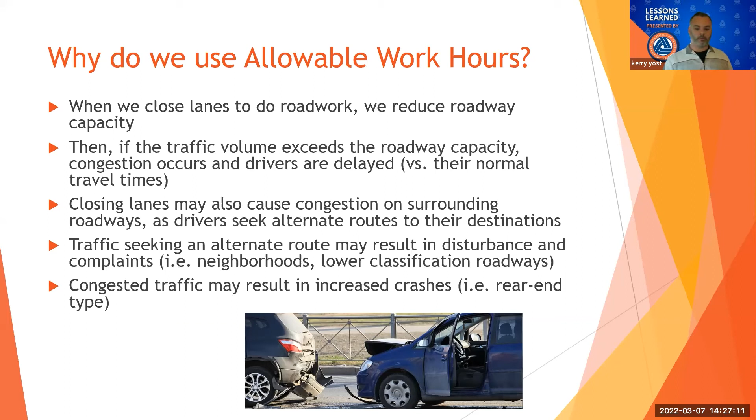So how do we work with engineers to determine what the allowable work hours are going to be? We have traffic data available from a variety of sources. We have a strong network of traffic monitoring and counting equipment, whether automatic count stations or loop detectors on our existing traffic signals. We're able to pull that data and quantify on an hour-by-hour basis what the hourly traffic is for that roadway facility. Then, based on the lane capacity for that facility, we can determine if closing this lane during this hour puts us over or under capacity. It's really just that simple.

On our lower volume roadways where we don't have active monitoring equipment, we could set a temporary solution such as a tube counter or an automated video counting solution.

We also have the traffic summary book that planning maintains. Using that resource, it's not an exact science, but we can take the ADT from the traffic summary book, and then we have data called the diurnal distribution—we expect 5.3% of the ADT to be during this hour, for example. So we can break it down on a 24-hour basis and determine our allowable work hours based on those numbers.

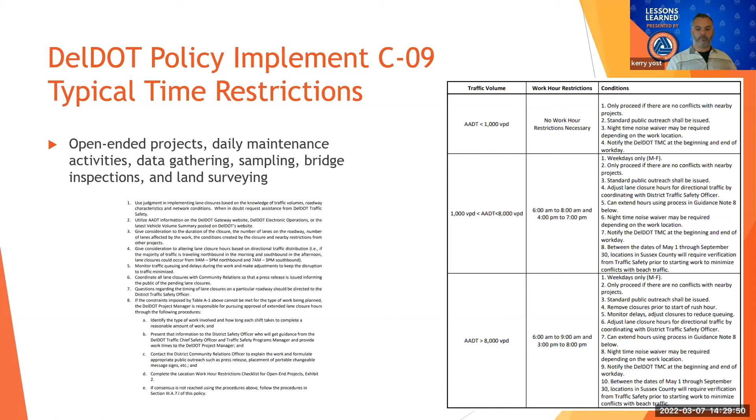And again, those are not for capital projects—these are for your open-ended, daily maintenance, etc. If in doubt, reach out to traffic safety and we'll work with you.

So another example, this is for a flagging operation. Some people, a lot of times we forget that a flagging operation is a lane closure. In most scenarios, say you have a two-way, two-lane roadway, we're going to close one lane. We are able to calculate what are the impacts.

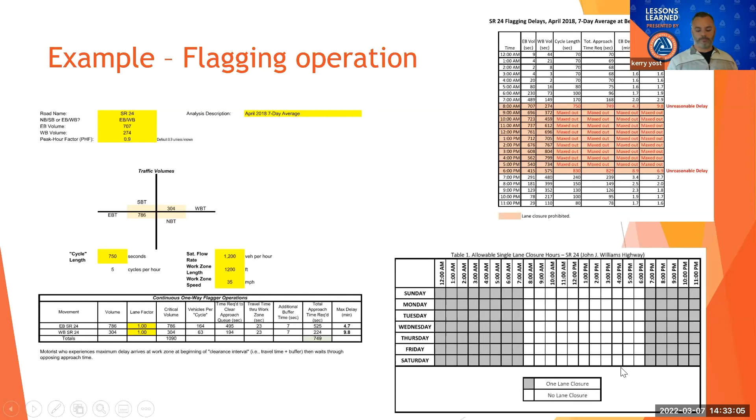So these next couple slides are specific questions we have. If the work that we need to do is going to take longer than the allowable work hours, first off, talk to traffic safety. We may be able to pull some updated traffic data. We may be able to examine how far over the threshold are we. Are we able to tolerate it?

If traffic's only 5 or 10% over capacity, and it's only going to result in 2 to 3 minutes of additional delay, as long as we consciously make that decision, that's fine.

However, if we reduce, let's say we allow the entire midday period, and those queues accumulate, and by the time we get to the PM peak hour, we've got an hour of delay added to that corridor because of the congestion that we've accrued. So there are other strategies to mitigate that congestion that we may be able to look at.

There are other options too, that if we do know that it's based on the severity or the urgency of the work, the high profile of the project, we can request approval from the executive management team. So, for example, anytime we want to do lane closures on or around the I-95 viaduct project, there is a formal process to get those requests and approvals up the chain right now.

And then you also can use an incentive or disincentive to motivate the contractor. Hey, we're going to give you these hours, but if you don't get it done in time, this is going to be your penalty, or vice versa. If you do get it done in time, here is your incentive.

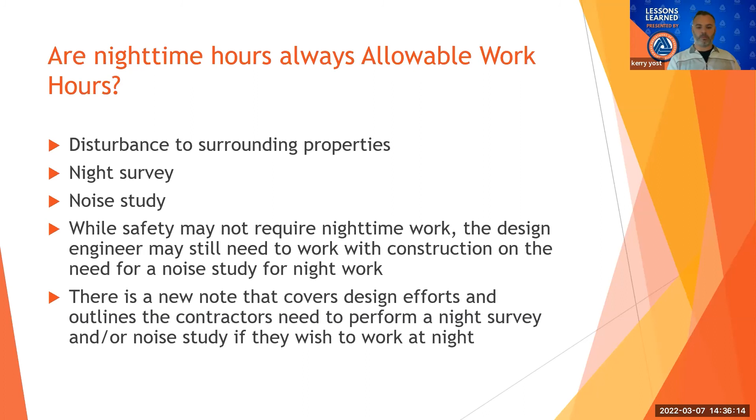When the allowable work hours are not followed, first and foremost, please coordinate with traffic safety, with the Transportation Management Center, the TMC. Our team is out on the roads every day looking at the projects, coordinating directly with the project manager and inspectors. If we know a project's contractors are on the road earlier or later than they're supposed to be, we're probably going to watch that project a lot closer.

You're going to have traffic safety out there much more frequently until we're on the same page. It's not so much that we're trying to nail you guys, it's that we want to be able to monitor that and essentially mitigate those concerns as soon as possible.

We are potentially open to unique situations. If we only permitted, say, a 5-hour window for an overnight lane closure, but the contractor presents that they need 8 hours to do this particular aspect of construction, then we can crunch the numbers and see what hours are going to be best to do that.

We're really trying to avoid complaints from the public, from the legislators. They call in either to their legislators, and then it comes into the higher ups, or complaints go directly into the TMC. Ultimately, the better we can communicate our allowable work hours, the better we give everyone fair expectations.

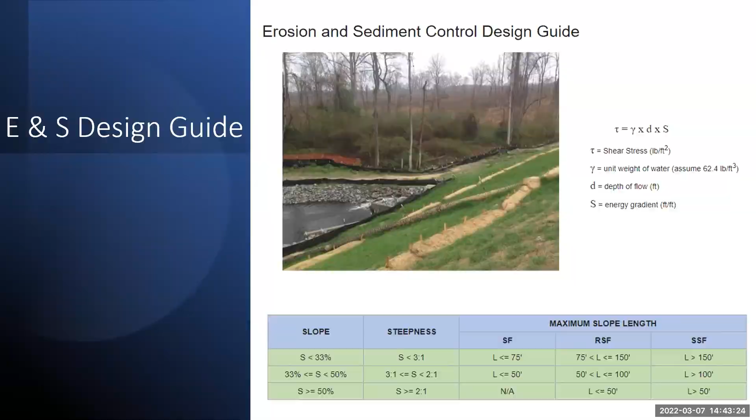Next slide. So for the project level DURMM, an example problem is currently being developed. That should be up pretty soon. That'll go through the whole steps of how to do what we call the PLD. Basically, that's your debit of what your project is going to have that you would owe from a stormwater quality aspect.

In our hydraulics section, I came up with what I call a hydraulic review and basic pipe sizing design aid. So if you had, for example, a driveway culvert or a really simple pipe to put in, I have a process in there that makes it a lot easier. Then for the hydraulic review, if you had to look at some plans and make a quick decision on whether that pipe system would probably work or not, it's a really quick way of checking that type of system.

And then under hydrology, the watershed delineation and runoff analysis goes through the whole aspects of how you do a watershed delineation, how you determine the amount of runoff. And then of course, Cv and Fv compliance, which under the reg language is basically how to attain compliance for your 10-year and 100-year storm events. Next.

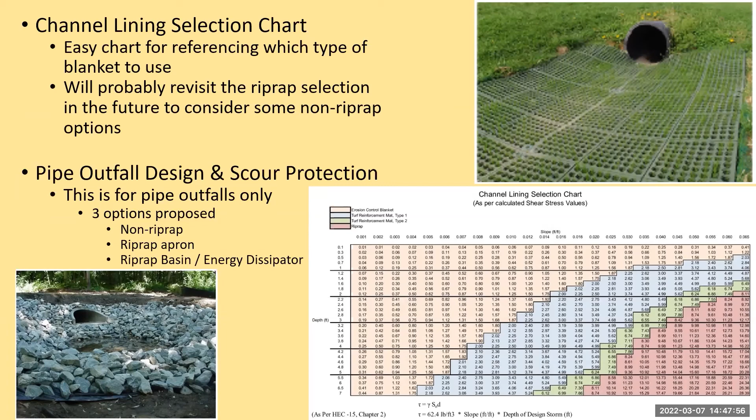For the model stormwater management plan sheets, I'm not sure if we have a link to the DRC up yet, but that's pretty much what it would go to. One thing we have right now in addition is a forebay spillway detail. You can see that at the bottom, under this wiki page.

And also just recently, we're going to have an inspection port detail update. That relates to how we have to do post-construction infiltration testing, which is required under the regulations, so that'll be coming up soon. Those inspection ports are basically for infiltration trenches, and also for bioretention areas that have infiltration.

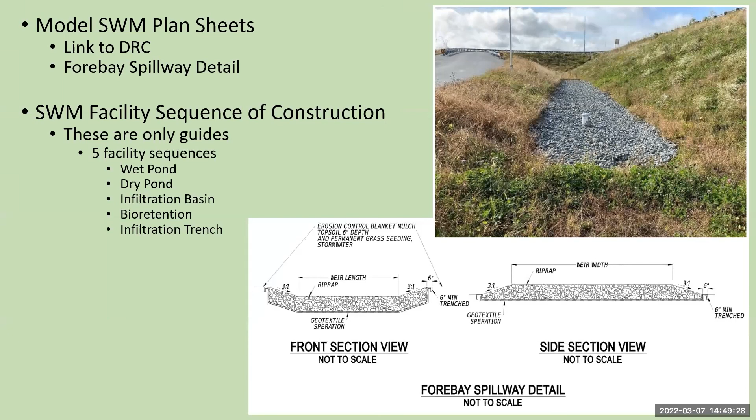Under the facility sequence of construction, we currently have 5 facility sequences. Basically those are guides that if you just copy and paste, it might work, but really every location has a particular way or might have different circumstances where those sequences should be changed for that particular facility wherever it's located.

This is a pretty big one, the stormwater facility design guidance. Right now we have 3 facilities shown: the infiltration trench, wet pond, and bioretention. We're trying to add a couple more later so we can get those done.

These design guidances take you literally from that project manager who says design this and walks away, all the way through to the very end. It's all done with HydroCAD. Every single step is labeled out, with little red arrows to show you which boxes to check. So it should be a really good guidance document to help you get from A to B.

Because that's something we've never really had, usually it's, well, get whoever did the last design and get up with them to see how they did it. A lot of times, even if you've designed one of these type facilities, you might not design another one for 2 or 3 years, and there's definitely a lot of information that's either forgotten or not remembered.

We also have the downloadable form to fill out for the facility number request. That'll be a specific number assigned to a facility, because all the facilities that DelDOT owns, we have to maintain them forever. So when it gets through construction, gets through final acceptance, it gets turned over to our NPDES group, who again will have to maintain these facilities forever.

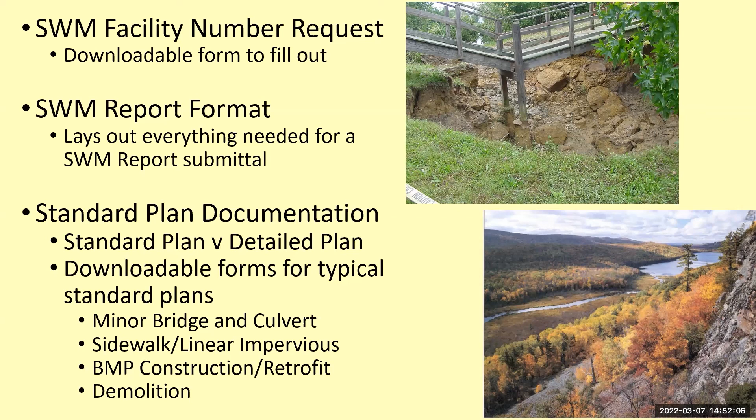For the maintenance section, I labeled this as maintenance only because I did it as kind of a down and dirty stream diversion. It's something I don't think we necessarily want our contractors to really do, because these stream diversions are really not made for the long term.

As you can imagine, if our maintenance forces need to go out and replace a pipe somewhere, and they have either a small stream or the potential for runoff from a rainstorm coming through, you want to be able to keep that area dry while you're replacing that pipe or culvert. So I get into a whole modified version of how that can be done.

Also, if they need to figure out a quantity for in-stream flow, I've actually developed an Excel sheet where all they have to do is fill in a few numbers, and you can figure out right away what's the flow rate in CFS as well as gallons per minute, because that can help decide which size pump you might need. There's also a whole discussion on all the different pumps and how to pick one for whatever you need.

And then we also have a flow chart, just like John had mentioned before, we love our flow charts. For our maintenance folks, maintenance activities under probably the second or third version of old regs used to all fall under what was called a waiver. Well, under the latest regs that started in February of 2019, there's no such thing as waivers or variances anymore.

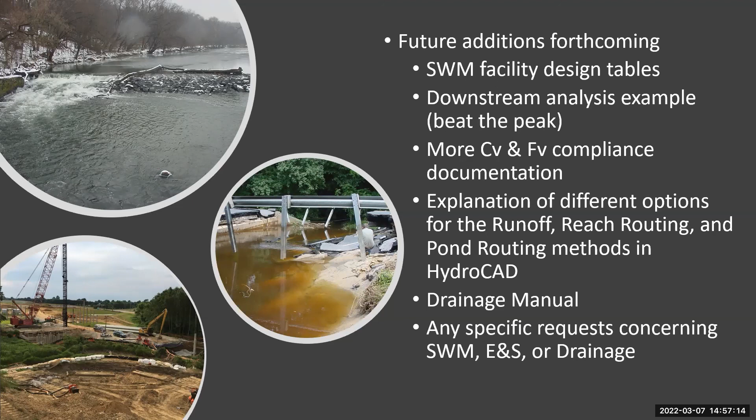One of our first questions: do you feel the wiki page information will be useful for your current position? Well, it looks like it'll be useful for quite a few people. I guess we can probably discount traffic.

And would you be interested in having some training sessions on all of this material? For the training sessions, I would imagine we'd try to break that up into maybe two-hour segments, kind of like a lunch and learn, although you'd have to provide your own lunch.

Alrighty, sounds great.

Hey Vince, this is Bob. We have one question for you. Bring it. Can the inspection ports be within the clear zone?